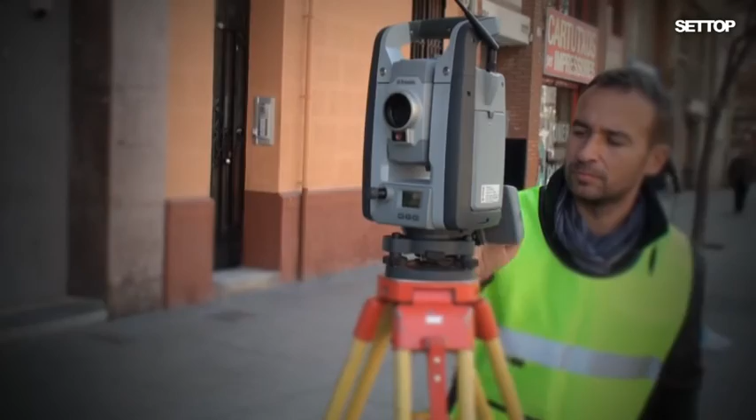Settop LevelMe, Precision Trigonometric Leveling. In the following operation, we shall perform a two-way trigonometric leveling covering 1 kilometer with the use of the Settop LevelMe application.

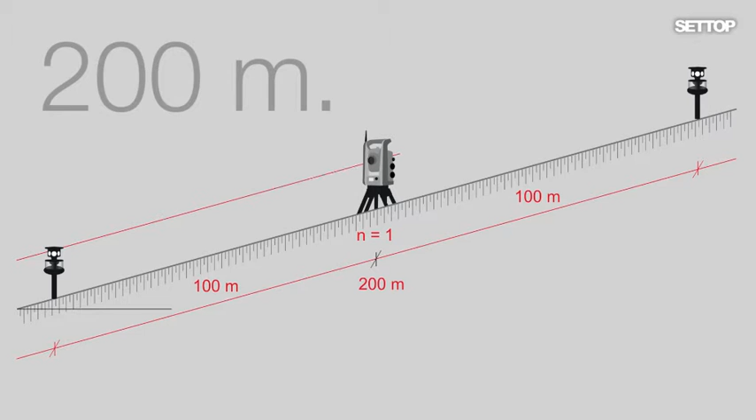In this way, we shall find out the accuracy obtained with a trigonometric leveling using a 1-second accuracy Trimble S8. First of all, we shall carry out a leveling on the basis of previously established points placed at intervals of approximately 200 meters, which means that 200 meters levelings will be made by means of 5 stationings in the outward course and 5 stationings in the return.

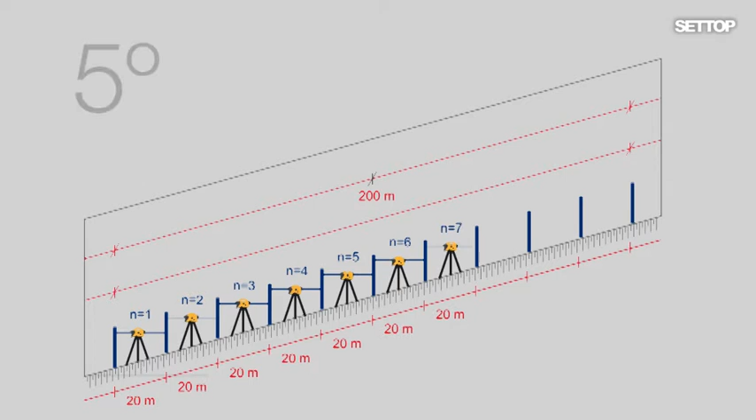With this method, and assuming an average inclination of 5 degrees, we can see the extent to which per each station we save 10 stationings made by geometric leveling. Users may feel at ease if they finally modify the leveling layout, as with LevelMe, one can find out if the intermediate points coincide, or if on the contrary, the return leveling runs along another course, while still indicating the same point name.

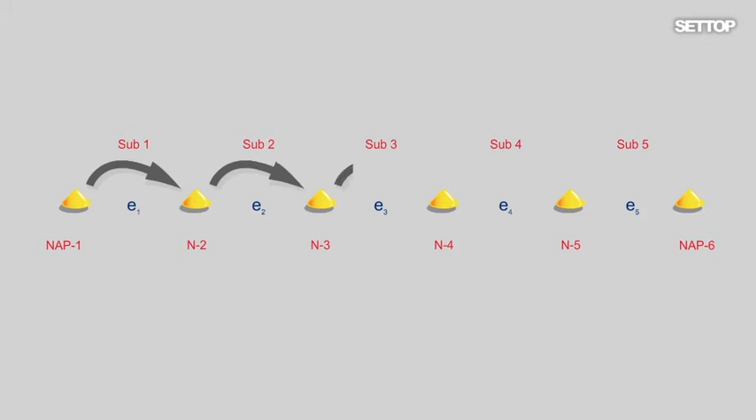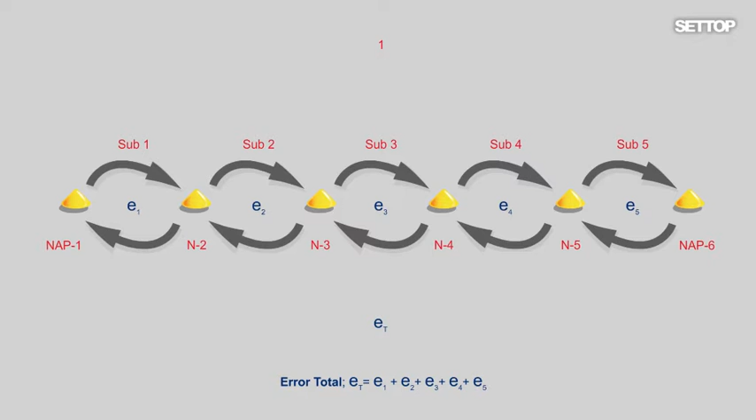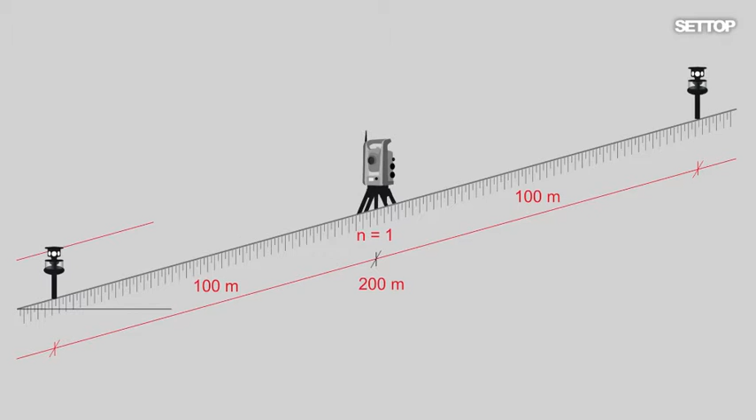LevelMe makes it possible to carry out 2 types of leveling: two-way leveling and double leveling. We shall select the most suitable leveling for each case. Here, for time optimization purposes, we shall select two-way leveling. In order to carry out the leveling, we shall situate ourselves, as with a geometric leveling, at the midpoint of each pair of points and will stick at a fixed height of 2.4 meters.

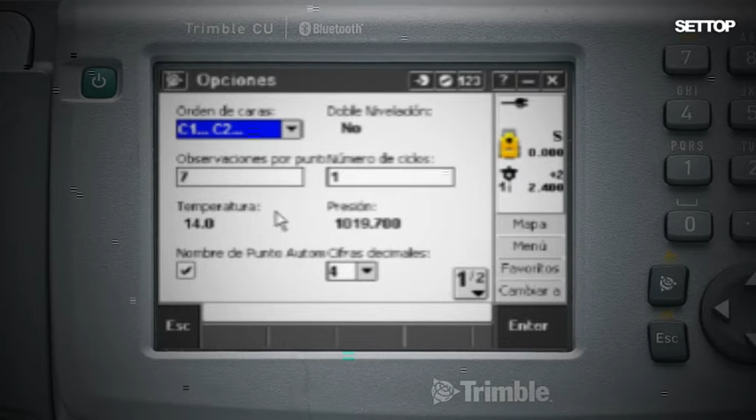Then, we shall establish the number of readings to be made and whether we want to also record in direct circle and in reverse circle. In the interests of accuracy, we shall make 7 readings in both direct circle and reverse circle. The device will automatically perform the rollovers to complete each one of the readings.

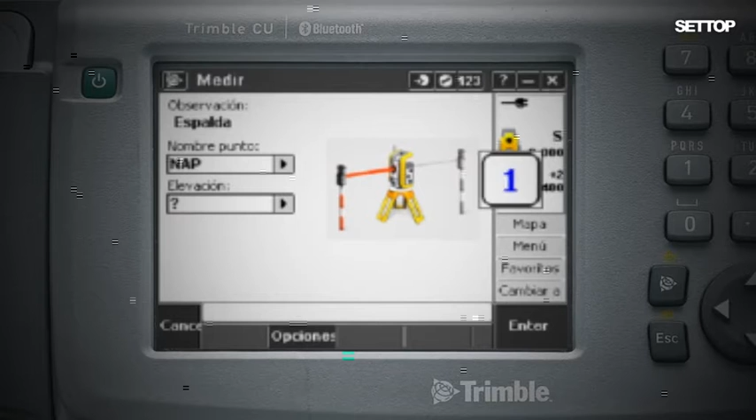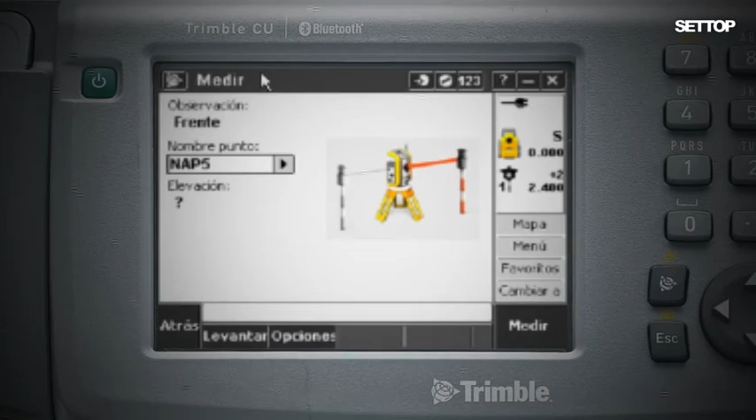When the leveling starts, the application checks the name and reference level. In our case, we start leveling at point NAP6. Once we have taken the back point, the possibility is enabled of rotating points or continuing with the front point NAP5. Once the first leveling is over, we can go on to the next part. In this case, as we are using the double leveling method, we shall station the equipment again and repeat the process.

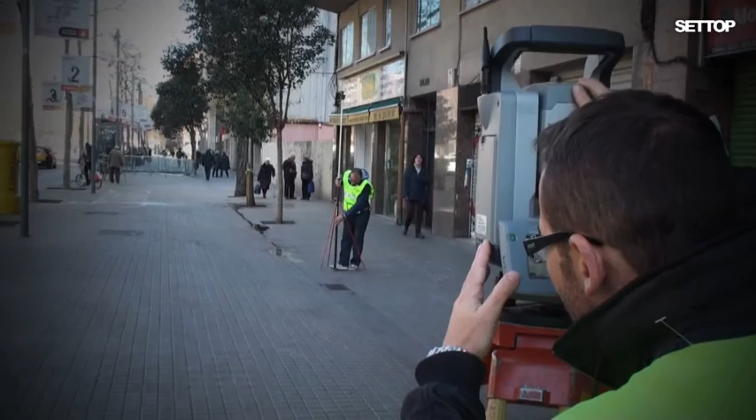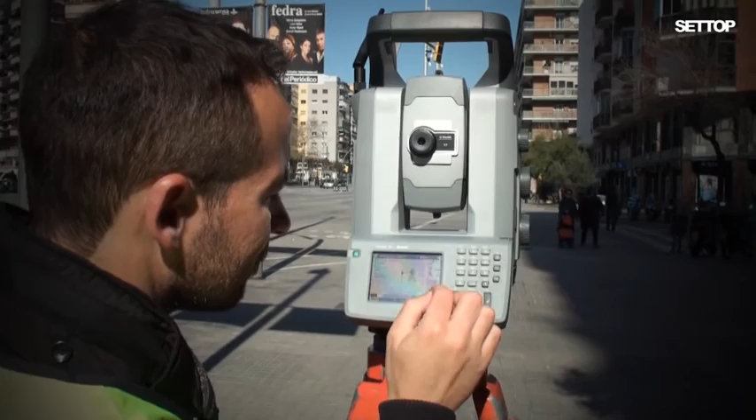Once the first part has been recorded, double leveling method, one must repeat the operation in the second part until all 5 parts have been completed. Once the 5 parts have been completed, we shall be able to close the loop, which means that if we turn to the loop section, we may observe how the closed loop option is enabled.

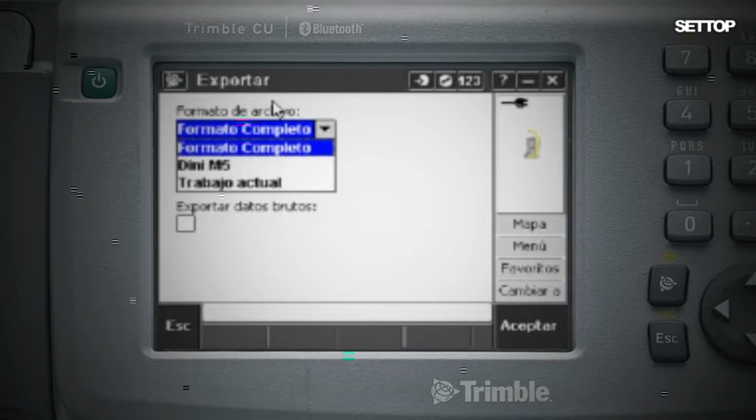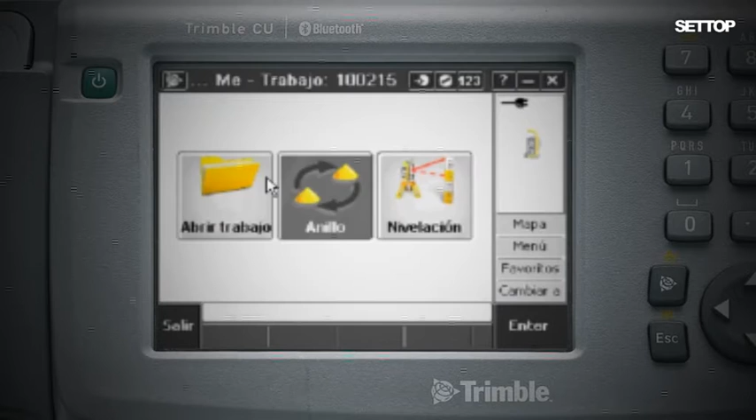Moreover, with LevelMe, one can export the file in full format, Trimble Dini M5, and current job, obtaining the sets of readings in each and a compensation report. In our leveling, one can observe that we have closed a full loop, both the outward and return courses amounting to 1 kilometer, the overall course being of 2 kilometers, and with an accuracy of 1.1 millimeters.

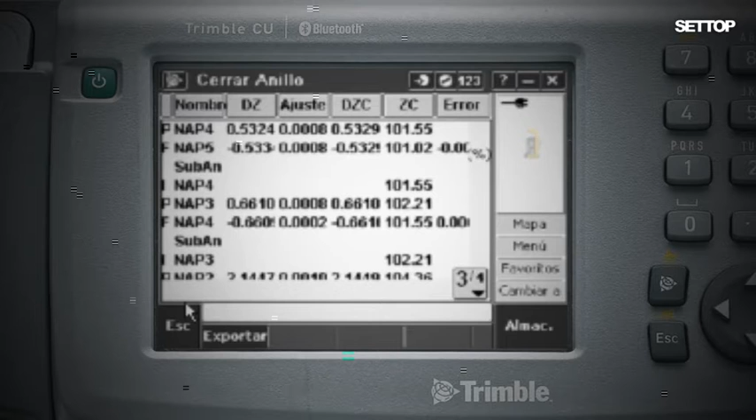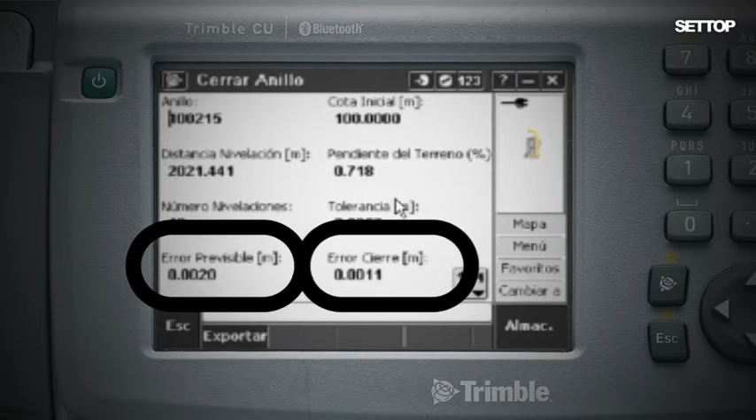One can also observe how the application discretizes the internal sub-loops by showing the partial closures of each subpart. The results show more accuracy than that expected, as along with the closure error, we can see the foreseeable error in accordance with the characteristics of the device and the geometry of the measurements made. In this case, the closure is of 1.1 millimeters, with a foreseeable error of 2 millimeters.

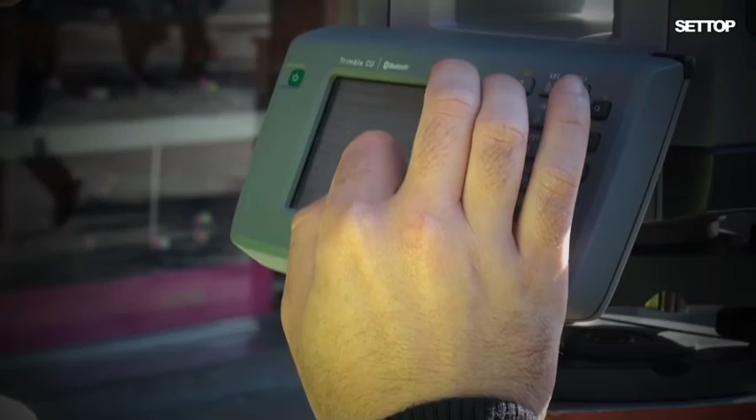LevelMe directly shows the closure errors and the compensation on our controller, without any need to perform tedious desktop work. Moreover, with LevelMe, one can export the file in Trimble Dini M5 format. SETTOP LevelMe is compatible with Trimble S series equipment.

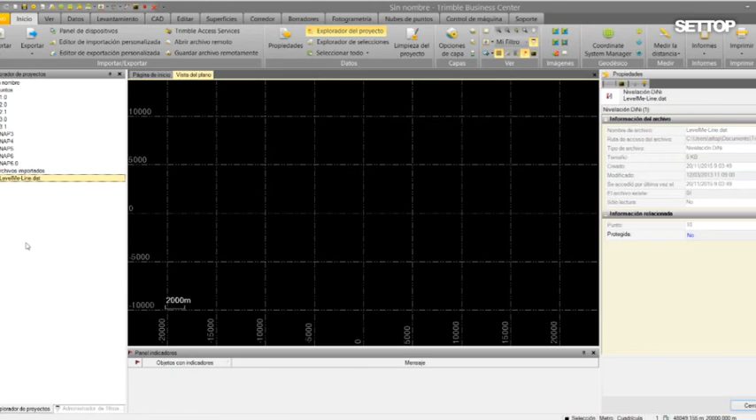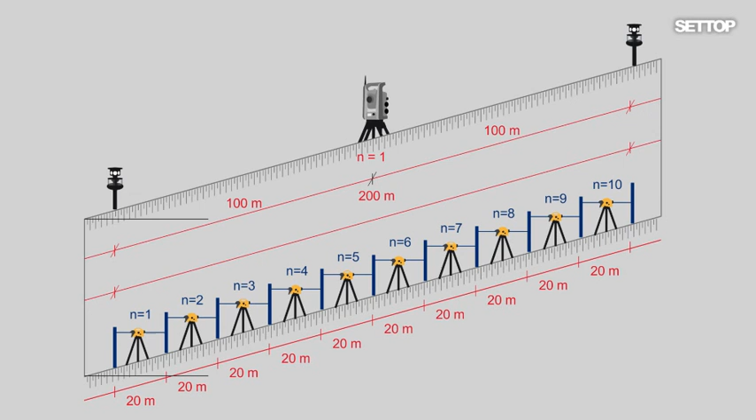As we can see, LevelMe makes full use of the possibilities of a trigonometric leveling, obtaining results that can compare with a high accuracy geometric leveling. One should also mention the additional advantage of the considerable time saved thanks to the increase of the distances and slopes, as well as a significant increase in productivity in relation to geometric leveling.